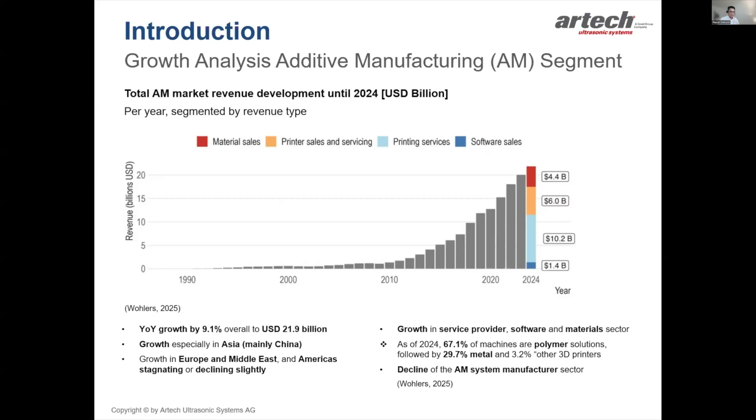It's very, very attractive. So let's have a look at the growth projection until 2033-34. Wohlers estimates the total AM segment to grow up to $115 billion. The key growth industries are health, aerospace, defense, and industrial.

Let's have a look at the value chain. How is the AM segment operating? This is a very simplified view of the value chain. Basically, the raw material is sourced from the ground and then processed or manufactured within the powder manufacturing companies.

There it is already crucial to define which kind of powder we are talking about — metal powder or polymers. This is also where Artech, or ultrasonic technology, comes into play first, helping in the powder processing stage of the powder manufacturing process. Then the powder is qualified according to particle size and quality. Once this is good, the powder enters the printing process.

In the printing process, the powder is filled into the printer, and then the 3D printer prints the parts. Within this process, there's also an integrated recycling process where Artech can help as well, to make sure the right powder goes into the recycling process.

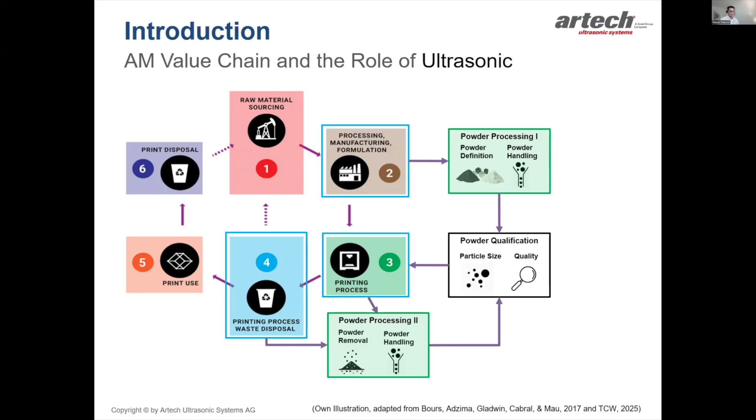So let's talk about Artech. Many of you have probably not heard of Artech — it's a pretty small company. We are headquartered in Switzerland, in Romanshorn at the Lake of Constance. We have a German warehouse for logistics purposes, and we were founded in 1991.

We're a small team, pretty agile, but we are benefiting from an internal and external partner network. We are a member of the Crest Group, established in 1961. It's a US corporation in New Jersey, and we are a member of several affiliates from the Crest Group. The Crest Group is the leader in innovative ultrasonic cleaning, welding, and joining equipment. Totally, we are a team of about 900 people.

So what makes Artec or our technology different? The current or previous state was to go exactly into a defined resonance point and bring parts into motion using a defined resonance. Artec, however, works within a frequency of 30 to 38 kilohertz. The ultrasonic generator scans the frequencies within the geometry and locks into the highest point, then sweeps around this point. Using this special technology, called frequency variation method, we are able to work with all geometries, metallic geometries. So we are very, very flexible.

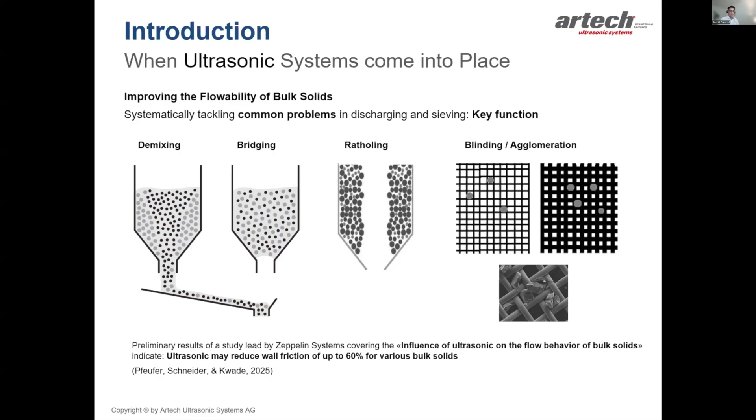So we are working together with several OEMs and partners. One is Zeppelin Systems. They have been conducting a study recently about the influence of ultrasonic on flow behavior of bulk solids, and the preliminary results indicate that ultrasonic may indeed reduce wall friction up to 60% for various bulk solids.

So in which kind of industrial areas are we operating? We are still in the powder manufacturing value chain—remember the second part of the value chain of the AM segment value chain. So we do ultrasonic discharging, dosing, feeding, and so on, and we also do ultrasonic screening.

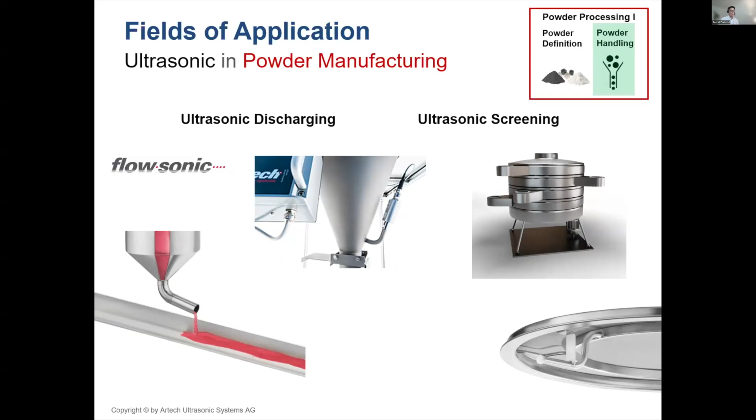Let's have a look at the ultrasonic discharging. On the left, you see a promo video where you can see that the powder, this is flour, is sticking above the outlet, building a nice bridge. Then we turn on the ultrasonic and the powder can easily, smoothly, without any noise, flow out of the cone. As you can see, we have to weld a waveguide to the outer wall, and then we can apply the sonic easily, and the powder can be discharged.

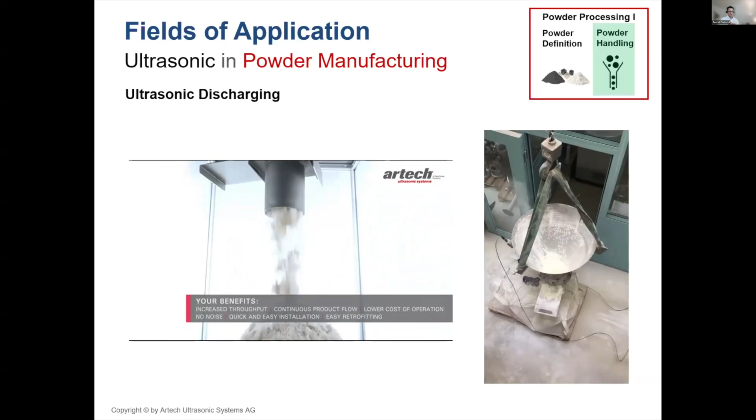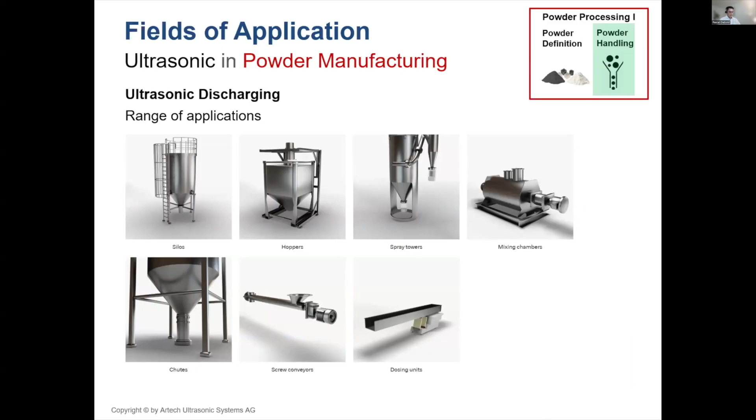On the other hand, on the right, this is titanium dioxide. The outlet is open, a bridge is formed, the ultrasonic goes on, and the powder can easily be discharged. Because of the technology, we are able to work with several applications—silos, hoppers, spray towers, pipes, whatever. Whenever there's a problem in flow, we can make a trial and help. That's a really nice approach: we can just give it a try everywhere where flowability must be increased. We might be able to help.

So when we look at the discharging sector, what are the influencing factors on the result? First is the material of the silo or hopper—is it stainless steel? How big is it, what's the diameter, how thick are the walls? How many sound points should we weld on the hopper or silo? The temperature, the humidity—very important for how the powder evolves or behaves—the size, and most importantly, the product properties. What are the characteristics of the product, density, and so on, very important. All those factors influence the outcome of our solution.

Let's have a look at one of the field samples. So this is a discharging hopper, discharging aluminum oxide powder.

The problem here was that agglomerates build up on the inner walls of the cone, causing quality issues for the end user because the agglomerates were falling down the pipe like snowballs into the final product. This was not desired by the customer. Before using ultrasonic, the customer had to clean the inside walls many times using loud mechanical knockers and air, a very energy inefficient technology.

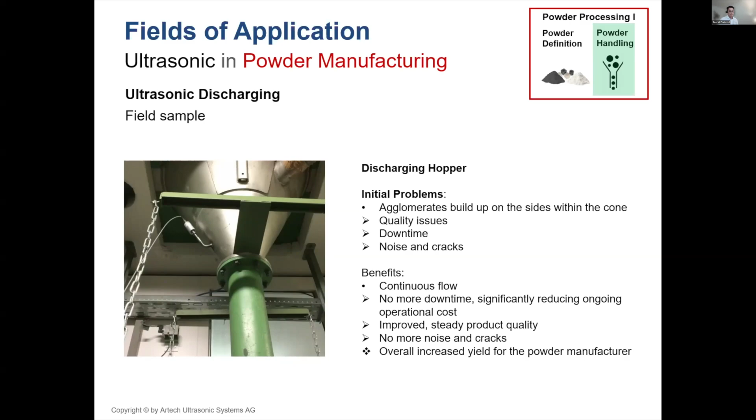With ultrasonic, we were able to ensure continuous flow. There was no more downtime, significantly reducing the ongoing operational costs. We could improve the product quality, no more cracks in the hopper, and overall the end customer was really happy because we could increase the overall yield for them.

Compared to classical flow aids, the benefits are obvious: continuous flow, almost completely residual emptying compared to mechanical knockers, for example, a high throughput rate, and almost no noise because we work at a frequency of 30-38 kilohertz, almost not hearable. The running costs are really low because the downtime can be reduced, and also the energy consumption is very low.

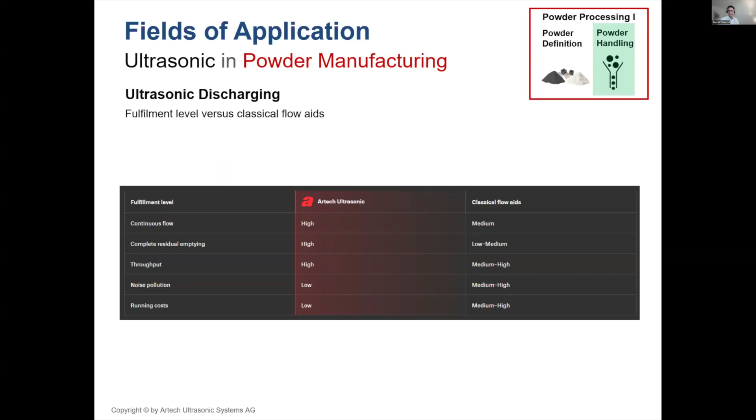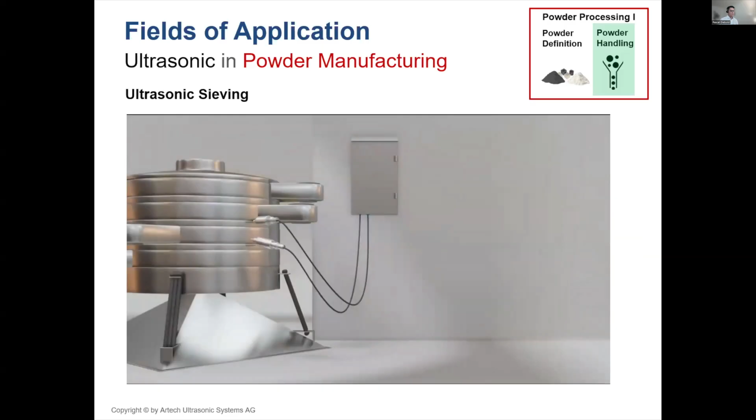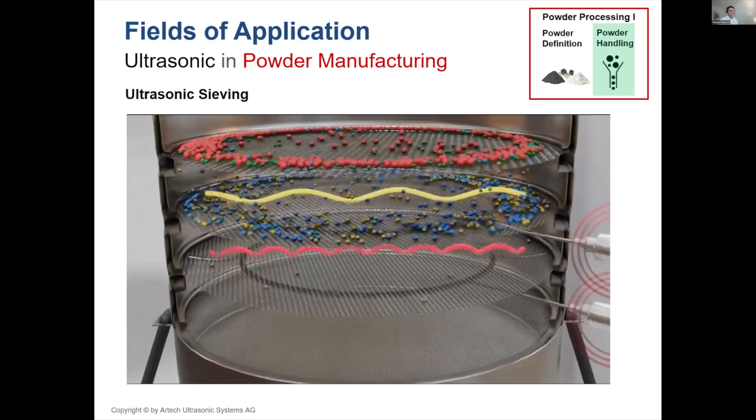As you can see, the powder flows pretty poorly without ultrasonic, pretty slow. Now we attach ultrasonic to the sieves, and as you can see, this video demonstrates that the throughput rate of the sieving process can be substantially increased. I'll show you some data later on about this. Compared to before, the powder is going through much faster, which increases the separation efficiency as well, and that also increases the yield at the end.

We work with several sieving machines, tumbler sieving machines, vibrating sieving machines, and so on.

Let's have a look at the field study. This study was conducted by our Japanese colleague. As you can see, the problem was, as I outlined before, always the same: plugging. The sieve was plugging. The customer used a 700 millimeter diameter sieving machine, so not too big. The mesh opening was 38 microns, and the task was to reduce the clogging tendency and increase the throughput rate.

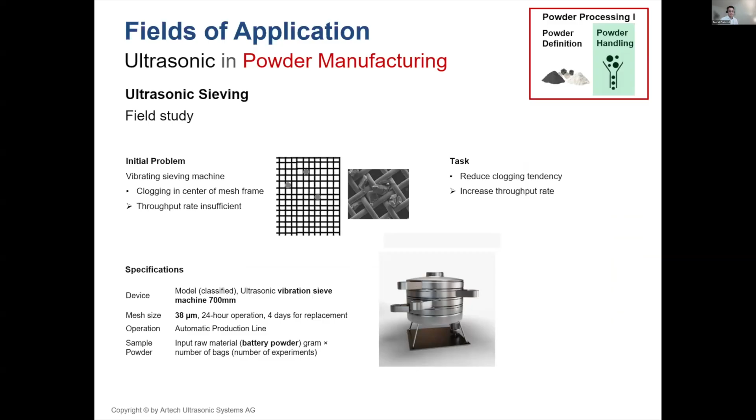From 0 to 1 minute without ultrasonic, 60% of the powder was still remaining on the sieve, whereas with ultrasonic only 30% was remaining after 1 minute. After 5 minutes, about 25% of the powder was remaining on the sieve without ultrasonic, and with ultrasonic already only about 2% remained. After 10 minutes, without ultrasonic still about 20% was remaining on the sieve, whereas with ultrasonic less than 1% remained.

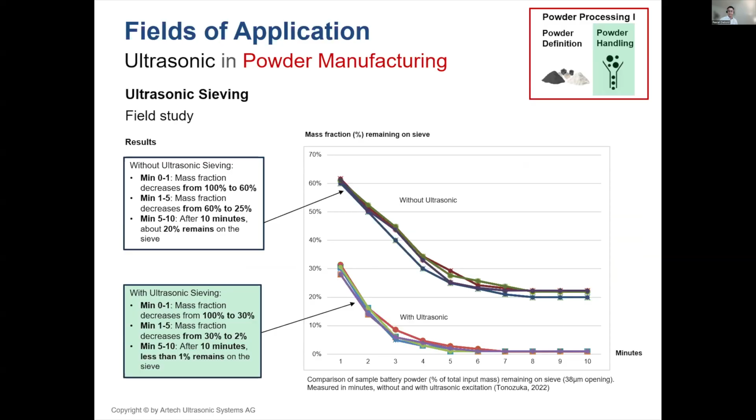This clearly shows that ultrasonic helps, regardless of the powder—whether it's battery powder, metal powder, or polymers—to increase the throughput. So let's have a look at the benefits.

Ultrasonic, as such, is the dominant technology when it comes to maximizing throughput rate and separation efficiency. What Artech does differently is that we never have our components within the sieving area. Our converters are always outside the sieving area, so our customers never have to fear any contamination. Our technology also enables us to work with several kinds of sieve designs. I'll show you later on, and we are very versatile.

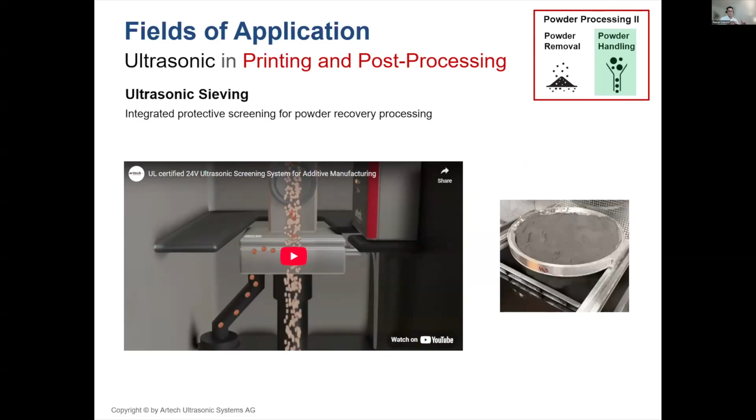Let's have a look at the next stage where Artech can help. Now we move from the powder manufacturing stage to the printing process. We look at the process where the powder is printed from the 3D printer and recycled within this printer or as a peripheral station. This video should demonstrate it pretty easily so you guys understand it.

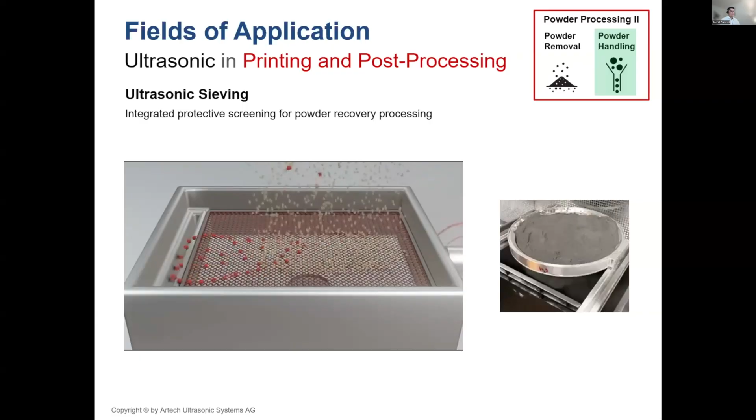As you can see on top, this is powder already used in the printing process, put through a recovery process, and it falls onto the sieve. The job of the sieve is to ensure the right particles move into the next phase, while undesired particles move out the outlet. At the end of the day, the end user wants to reuse this powder from the printing process back in his printing process.

Another video shows on the right how fast ultrasonic can sieve powder, and that almost no powder remains at the end, pretty fast.

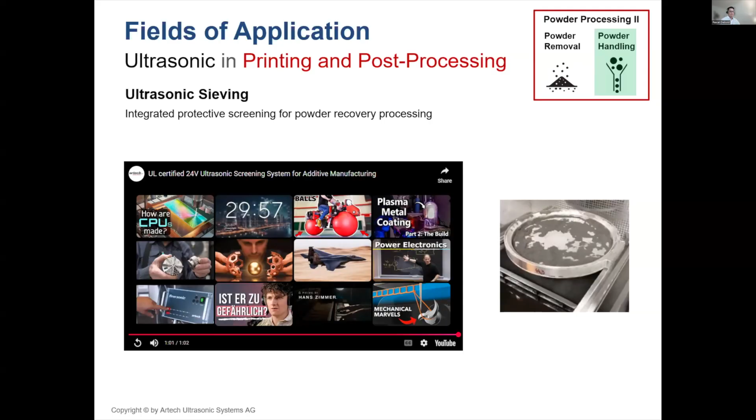This is an integrated approach by one of our customers, showing a sophisticated way to recover powder from the 3D printing powder process.

I don't want to go too much into detail, but on the left you can see our generator attached to the machine, and the cable with the converter attached to the sieve. The sieve's job is again to make sure the right particles go into the container that can then be reused in the printing process.

As you can see from this figure, the powder goes from the AM machine back to the recovery process, over a buffer, and the vibrating chute then doses it into an ultrasonic screen. The ultrasonic screen makes sure the oversized particles go as fast and precisely as possible into the oversized container, and vice versa, the good powder into the good container.

This is one of our customers in Switzerland, a young startup showing a laser bed powder fusion system. It's a very unique, compact system.

So they are using a peripheral station. This is a pilot system. I'm just showing this for demonstration because it's not the final product, but it really nicely shows the ultrasonic process.

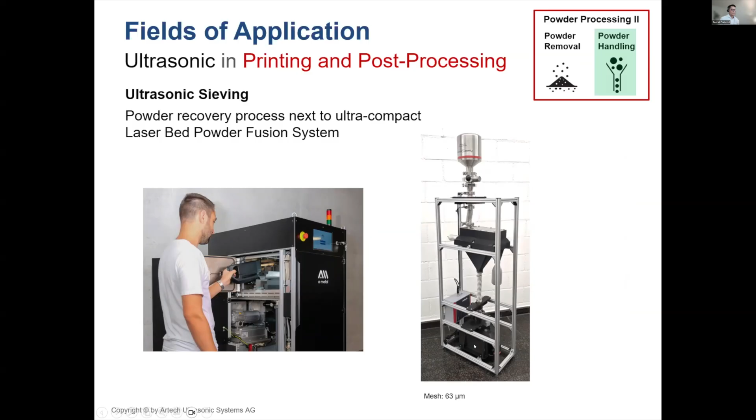Next to the ultrasonic components, Artech is offering rectangular and round sieves for the integrated printing post-processing part of the value chain. As you can see from this picture, we offer several dimensions, and the waveguide, this part here, which allows the converter to excite the sonic to the sieve, can be placed everywhere according to the specification.

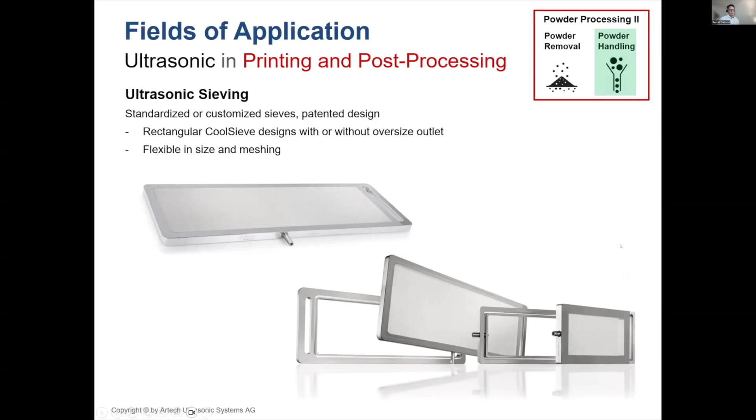So why is this relevant? Why am I showing you this? Because Artech has a special patent on this design. If you look at the sieve on the right lower corner, the waveguide is screwed onto the inner ring of the sieve, and the sonic is only applied to the inner ring where the mesh is glued. This allows the OEM to completely isolate the sieve without sacrificing sonic performance on the inner ring.

We already have a lot of customers who really like this design because it helps them use less power than before, create very compact sieve designs, and sell even more compact machines.

And why is it called cool sieve? Because the outer area always remains cool, since it's decoupled from the inner area. It's a bit technical, but pretty simple. At the end of the day: more compact design, less power needed on the sieve, and very efficient.

We do have UL NFPA 79 certification, and can work with ATEX Zone 21/22. Design can be made according to the machine, with easy installation and retrofit possible. So existing machines can be retrofitted with our systems, and remeshing can take place wherever you like, freedom of choice. We are very flexible in this. Those are the benefits of the cool-sieve design.

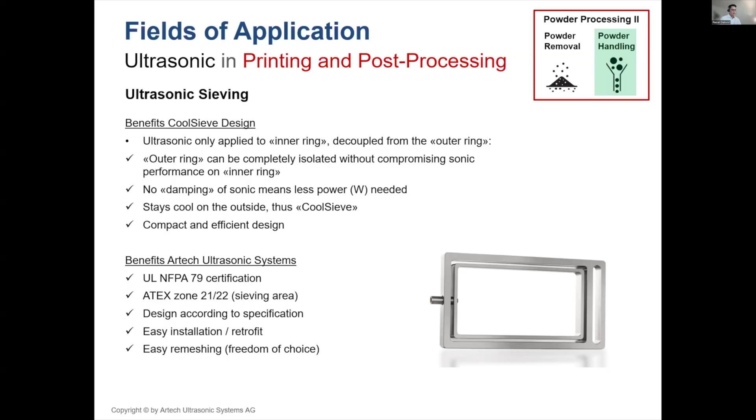So let's go to the last part of the value chain where we can help. We had the powder manufacturing value chain where we help industrialize the powder manufacturing process through ultrasonic discharging and sieving. We helped in the printing process, and now we are in the post-processing.

Once the parts are printed, there is always remaining powder on the printed part, and this is very valuable powder. So our end users really like to recover this powder. There are different technologies on the marketplace, and nowadays ultrasonic can also help almost completely remove the residual powder of the printed parts, maximizing powder recovery and increasing yield for the end customer. Again, no contamination because the parts are not within the area, very low energy consumption, and low noise.

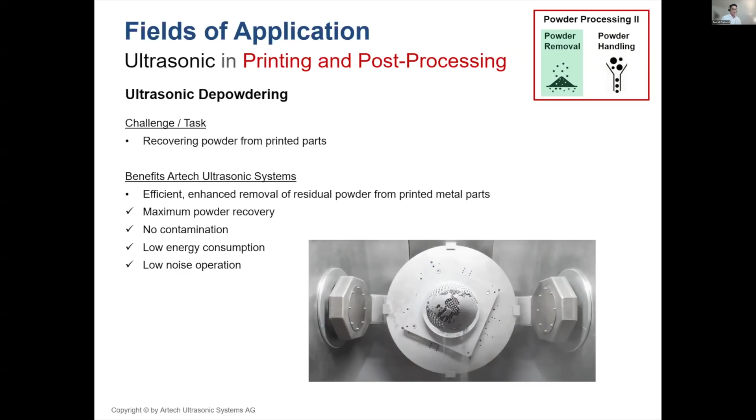So what do we offer at all? We are an ultrasonic component supplier. We are not a machine builder, okay? So we offer generators, converters, cables, sieves, small sieves especially, and accessories, depending on your task. We're very happy to get in contact with you. Whatever your task is, I'm sure we can help you.

Yeah, I'm already at the end. Hopefully it wasn't too boring after lunch. No, everyone is a bit tired, but hopefully it could wake you up a bit. And I'm very happy to answer any questions you may have. And if you want to get in contact with Artech, feel free. Visit our website, LinkedIn, and so on.

Thank you very much for your talk, Pascal. As I can see, there are some questions. How does ultrasonic mitigate segregation or demixing due to differences in particle size or differences in density of the product?

Very good question. I believe this is about the discharging process. So what ultrasonic does is not really impact the inner powder mix. What Artech does is only apply the sonic to the walls of the geometry, and thereby the wall friction will be reduced. So if the powder can flow continuously in the discharging, in the cone or in the silo, once the outlet is open, then in many cases there is even no demixing possible because the whole powder can flow in the same motion out of the outlet cone. I hope this helps.

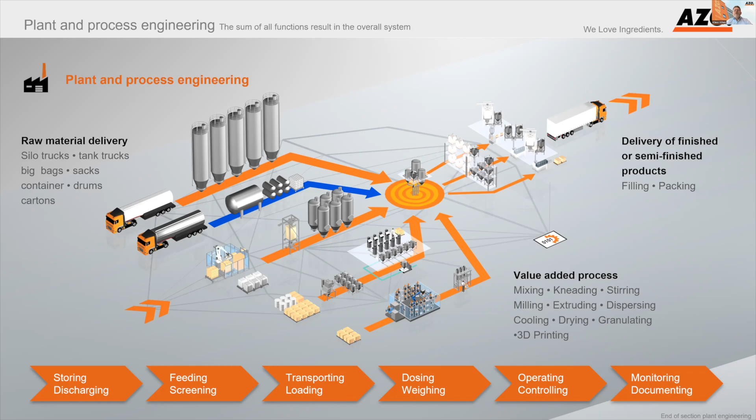What is AZO doing? AZO, I would say our passion is powder handling. That means we are handling the powders in the plants, in the production plants, from the incoming goods through the whole process to the value-added process in terms of mixers, kneaders, and for today's discussion, 3D printing systems. And in between here, we have all the conveying, storing, screening, transporting, weighing, controlling, monitoring and automation of these powders. We have a wide range of businesses. We are organized in different business units, always looking for the end product, starting with the food department.

This is our base. We started in the bakery industry 76 years ago, which contains everything around bakery, baking mixes, spices, flavors, and so on. Next part is so-called Vital, which is pharmaceutical business, dairy industry, confectionery, and so on.

On the non-food part, we have two different divisions. One is Chem, which contains cosmetics, personal care, cleaning agents, construction materials, and as well the additive manufacturing metal part. And last but not least, the polymer industry, looking for compounding, PVC, dry blends, and so on, as well as additive manufacturing for polymers. So there's a combination here.

Looking at the additive manufacturing world, let me start with the metal part. There's a big landscape of different processes in 3D printing. We are mainly focusing on powder-based processes like binder jetting, powder bed fusion, and so on. This is our strength and our know-how, so this is our concentration.

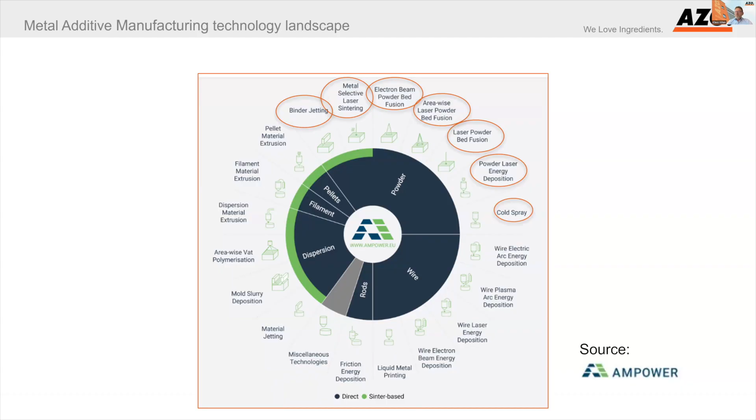Metal powders present a lot of different challenges in the additive manufacturing industry. We have very fine and always very heavy powders compared to other industries. Very fine, as already mentioned by Mr. Diepol for the screening systems.

We have a lot of reactive powders which have to be protected against the atmosphere. We have a lot of metal powders which are explosive, so protection is needed. We have to protect the operators too, because a lot of metal powders are CMR, meaning cancer causing or could cause cancer. We are talking about very expensive materials, so loss-free use is a must.

And we have to ensure quality in the processes, because the printers only work well with perfect materials. So this is one of the biggest challenges.

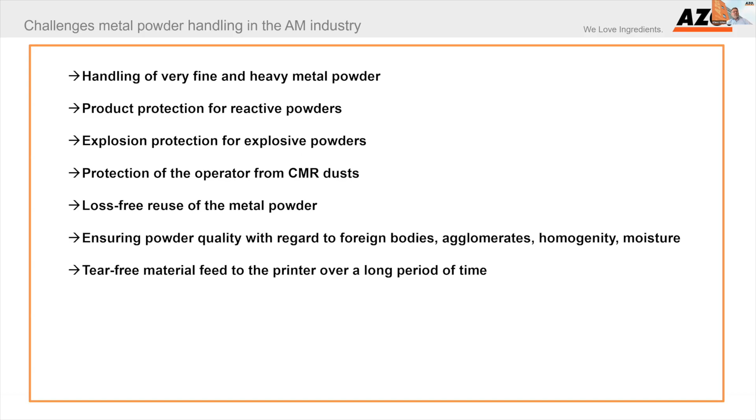The printers have long printing jobs, 24 hours, 48 hours, and so on. We have to take care of tear-free material feed to the printers. This is not typical for a normal powder process. Metal powders could also be abrasive, depending on what you have, so we also have to protect the equipment itself due to abrasion and so on.

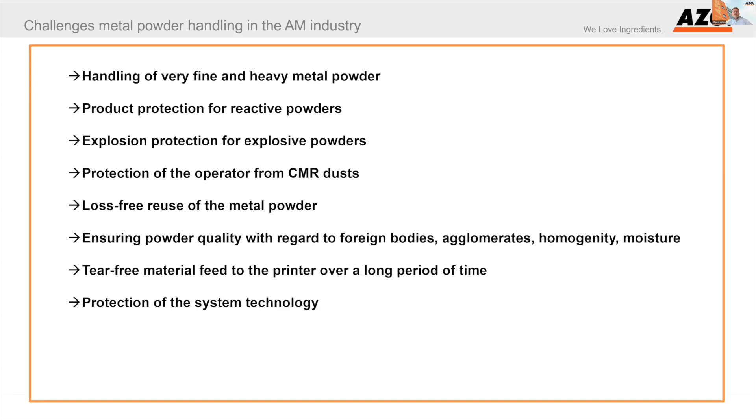How do we do this? Let me say a few words on what I'm going to show you. I'll show you some concepts, principal concepts and solutions, not going too much into detail, because then time will not be enough.

How does it typically look on the metal powder side? We always have a point for putting in new powder, and a point for unpacking powder when the print job is done. We collect all the materials at one point, and this is special because it's an integrated system - not an offline system, but an inline system, because we also pick up the overflow. We combine it together in a receiving unit, prepare it again in terms of dosing and screening, and have perfect powder afterwards which can be sent to the printer again.

If you go a step ahead, this could be done as well for multi-printer feeding, as we call it. This means we have one centralized station for preparation of the powders, and out of that we could feed several printers depending on how big the printers are. There's always a difference in terms of what kind of incoming packaging we have - this is flexible, even in how many breakout stations we have for unpacking. This could be combined, everything in one central preparation system.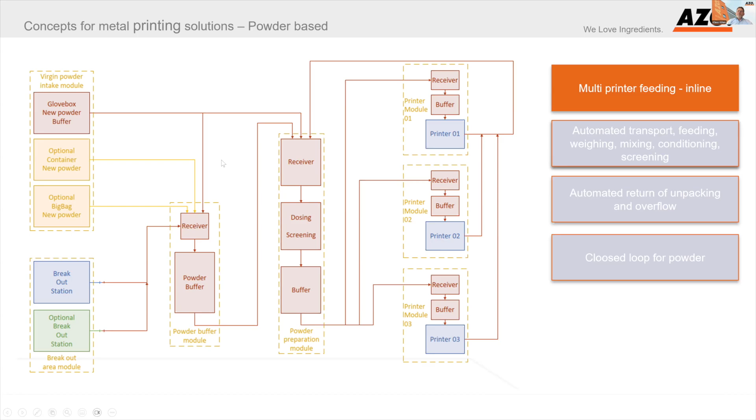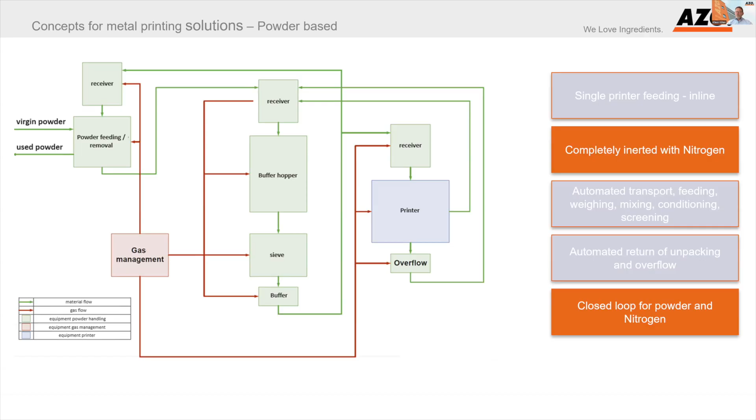That's just an overview of how a system could look, for example for multi-printer feeding. We have an incoming station here, actually using a glove box for the small drums which are very common in the industry, with buffering stations, and then a central preparation station which could feed several printers, including gas management, which will then serve the printers in a perfect way.

To give a more or less detailed example for a high-end system, which has been designed and produced with an OEM partner of ours, and we are allowed to show this here. A complete, highly automated system for single printer feeding, which is an LPBF process with a defined throughput.

And the system is flexible in terms of the metal powders here. We just have to do a parametrization for a special powder, no interaction in terms of mechanical modification or something like that.

With the system itself, we have powder handling under nitrogen atmosphere, a closed circuit for low nitrogen usage, as well as removal of the powders in the glove box. So operator protection is always given, product protection is always given, and explosion protection is also given all the time.

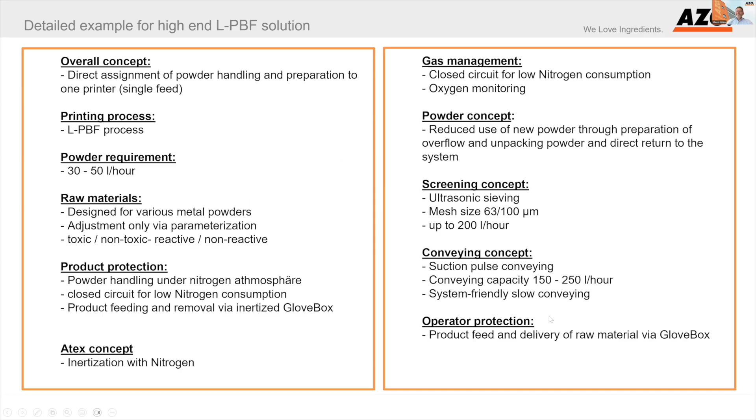Okay, and you do see here ultrasonic sieving, so the introduction from Mr. Diebold was perfect. How does it look like? Just to get a little bit more detail here, how does it look like?

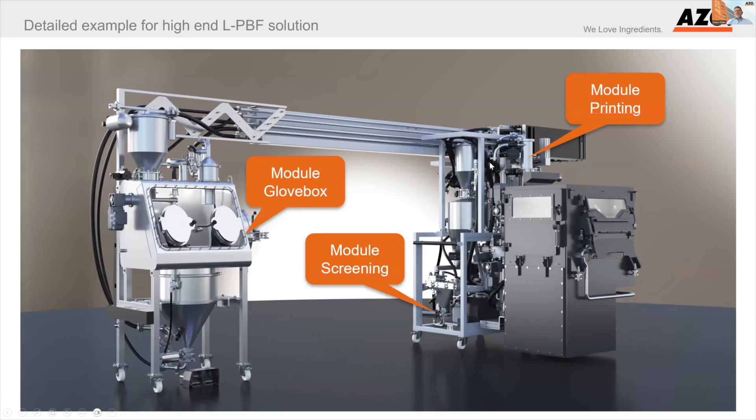Here we have a central dump station for the powders with the small drums, a so-called glove box module, which is connected to the system here, to our printing module, as well as a screening module. So therefore, again, product protection, operator protection, powder return is possible and done, completely protected and connected to the system itself.

Even so, here we have our so-called screening module with the full reuse of the powders. Also quality assurance and screening is given here.

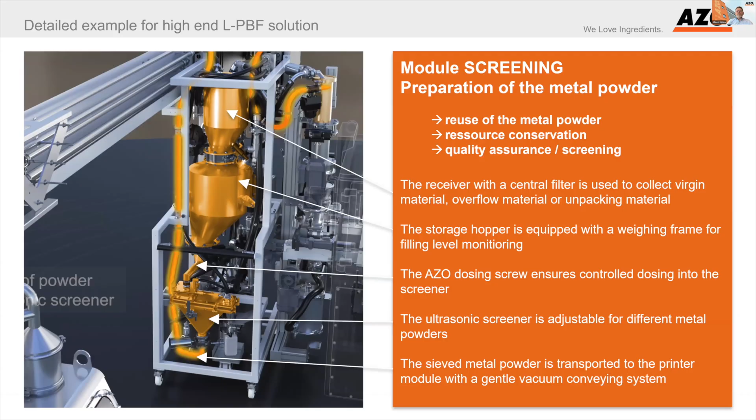This is a very special design because it's nearly integrated in the printer, so therefore it's one common system and direct feeding of the printer for the print shop here.

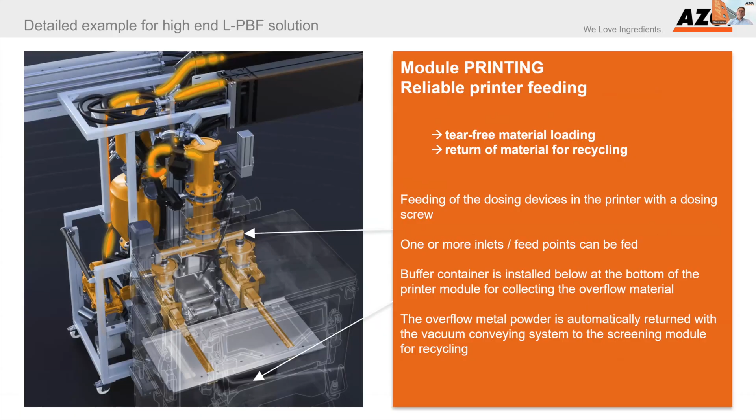Always inline, so nothing to do with it. It's working for itself and just has to refill the missing powder by the glove box. Also, the unpacking is done in the system, also in the closed loop. Here, in that example, we are unpacking in the printer itself, which is a little bit special, but always under controlled conditions here.

So that's for the metal. Just wanted to give you some examples of how the system has to look like, how the system for an integrated system is looking like. And as I said, just giving examples of how we are working on that.

So, the next package is the polymer, because we are considering also the polymer, which is a little bit different. And again, the landscape here is just one part for us, which is powder or pellet based, which we are considering here and which we could serve with our systems.

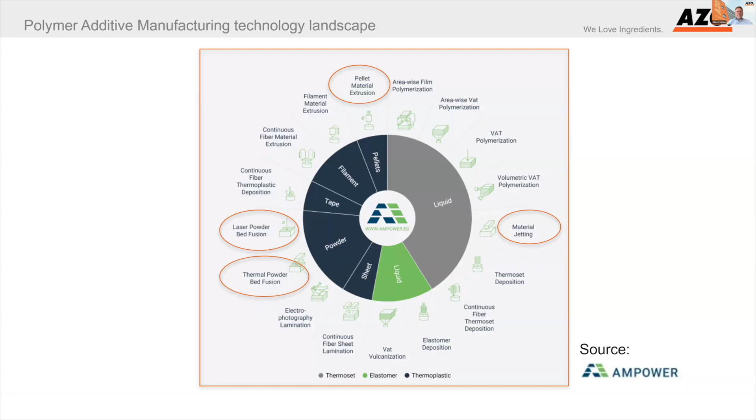Challenges in the polymer look a little bit different. As always, we have very fine polymer powders which are not easy to handle. We have to supply also single and multi printers, but we do have an increase of powder because we are getting bigger printers, and most of the time, looking at today's situation as well as the future, we are expecting really print factories with several printers, even which have to be fed from one system.

And ergonomics for the operators is always a question here. With these volumes we are actually facing, this couldn't be done completely by hand. So in the print factory, there's an integrated system needed for feeding and for recovering the powders.

Again here, loss-free use of the powders. Always also in the polymer industry, there's high cost pressure in production and in terms of efficiency. So therefore, there's a need for that.

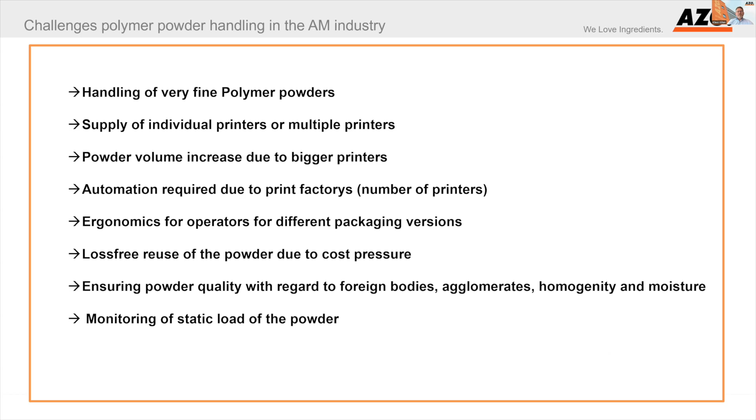Ensuring the powder quality means clear foreign bodies are not allowed. Agglomerates, homogeneity is one of the most critical issues in a printer. If you look at the printing process, here on the polymer powder, there's an additional issue, which is static load of the powder. That's typical for a polymer powder. It's getting static load on it, and you have to get rid of that because the printer couldn't work with a static load, and the powders will not work.

Some overview of the concepts we are working on and delivering. Our incoming goods are typically big bags or bags, fed into a mixing process with a scale. We generate a recipe with new powder and used powder breakout, as well as overflow. Requirements from printers vary on how much new versus used powder can be used. The recipe depends on powder quality, then it's prepared properly and goes through a sieving process, since no agglomerates or foreign particles are allowed, before feeding the printer properly.

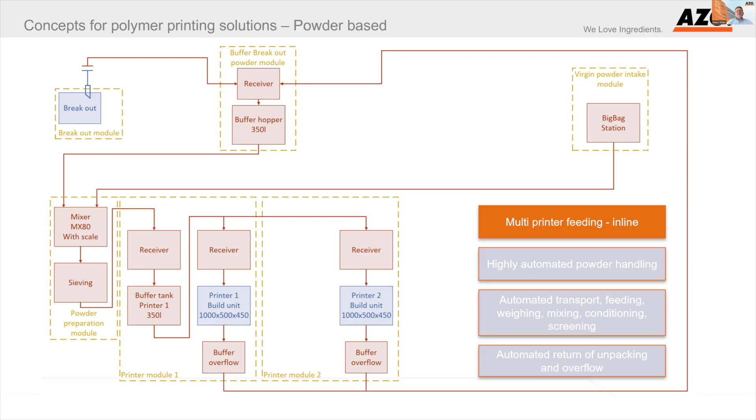There's also the possibility of single printer feeding as well as multi-printer feeding, very similar to the metal powder process, with different designs and requirements. Here we're looking more at bigger print factories, since we see much higher potential for printer factories.

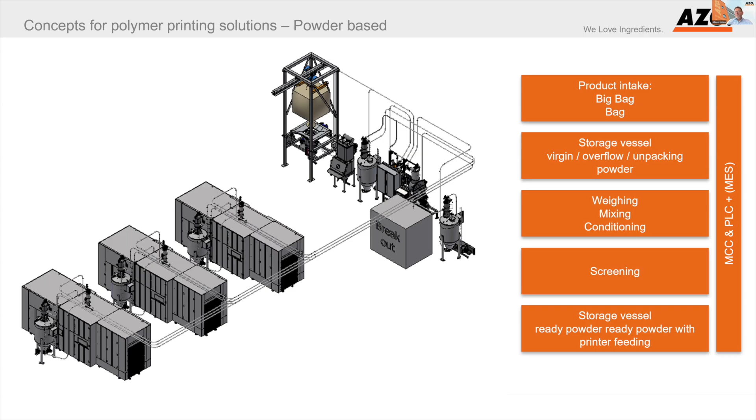This looks very similar, with different applications. For example, incoming virgin powders are typically delivered in big bags or bags, which go through different stations. We have a lot more buffering stations here due to throughput, and also because of mixing and moisturizing the material. At the end, we feed several printers. There are also buffer stations in front of the mixer and in front of the printer, which is very important and makes the difference compared to metal powder systems.

I'm nearly through. What features do we have here? An automated and closed feeding system, which is important as an integrated system, minimizing dust and so on. These systems are all tailored, meaning each printer needs its own system or connection with its own philosophy. So we have our basic designs, which we tailor to the customer's request or the service provider's request.

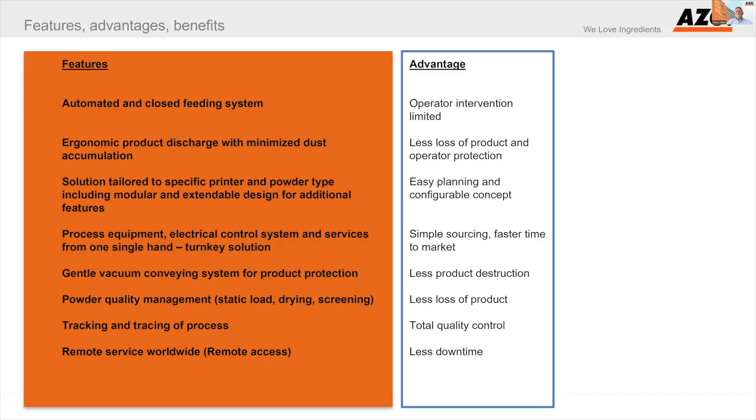What about the internal structure? We can supply the complete system as a turnkey solution, since we also handle the control system. We always look for gentle conveying, to protect both the equipment and the powder quality, which is one of the highest priorities. We can also do tracking and tracing, and worldwide service is provided. With these integrated systems and concepts, we see a lot of advantages and benefits for our customers, maybe for you.

That was a quick run-through of what we do and provide for metal powder additive manufacturing as well as polymer systems—a little different, with its own challenges. Thank you.

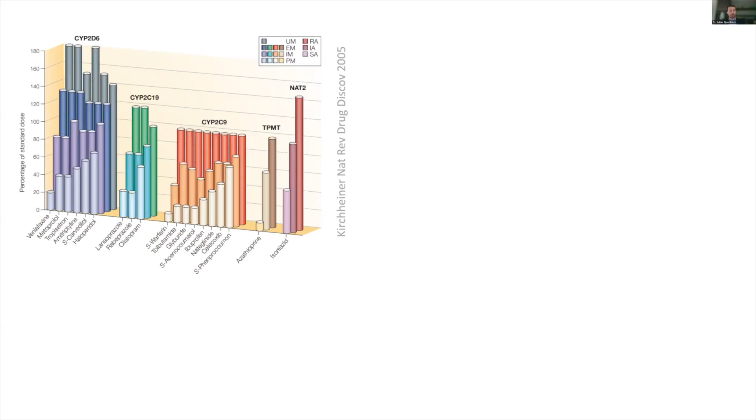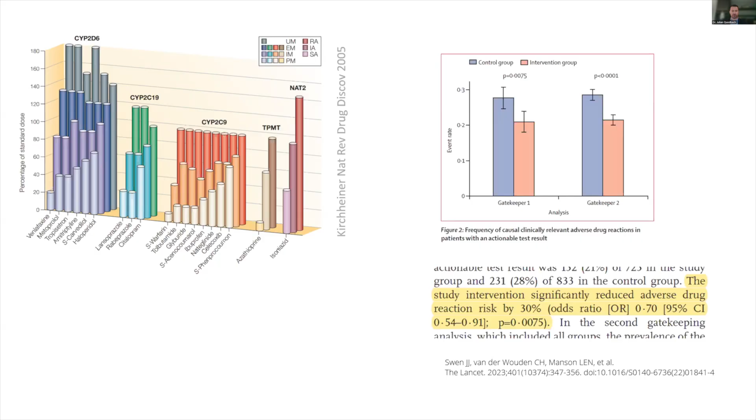If we adhere to these kinds of individualization approaches, it's possible to reduce adverse drug reactions by 30%, which is a lot - greatly improving the quality of life of patients, but also reducing sick days.

What's quite interesting, and some of you may not know, is that women on average suffer from nearly twice as many adverse drug reactions as men, because typically only men, or primarily men, are reflected in clinical trials. And worse - because it's been known for the longest time - children are not little adults.

So if you have a certain medication prescribed to adults based on their weight, it's impossible to just take a fraction of that drug based on the child's weight and administer it that way. So for pediatric patients, we need dedicated medication.

Including all of those concepts is the overarching framework of personalized medicine, which the European Medicines Agency describes as using the individual's phenotypes and genotypes—basically enzyme status, metabolic status, different technologies, and lifestyle data—for tailoring the right therapeutic strategy for the right person at the right time.

With the potential challenge that it may be necessary to manufacture medication for an individual patient. In many cases it will be larger patient groups, but in very critical cases it can be necessary to manufacture an oral medication for one individual patient.

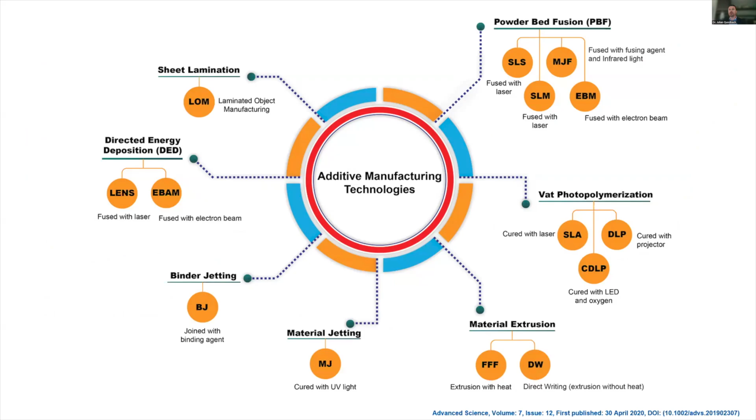This is just a transition slide showing the different technologies that exist, and there are of course more subvariants available. For pharmaceutical 3D printing, it's possible to consider two different strategies of manufacturing.

One is at the point of care, close to the patient, which could be a hospital pharmacy or a community pharmacy. The other is centralized manufacturing, which could be compounding centers, as we have in the Netherlands—larger centers able to manufacture individual medication manually for a larger group of patients and supply those to others.

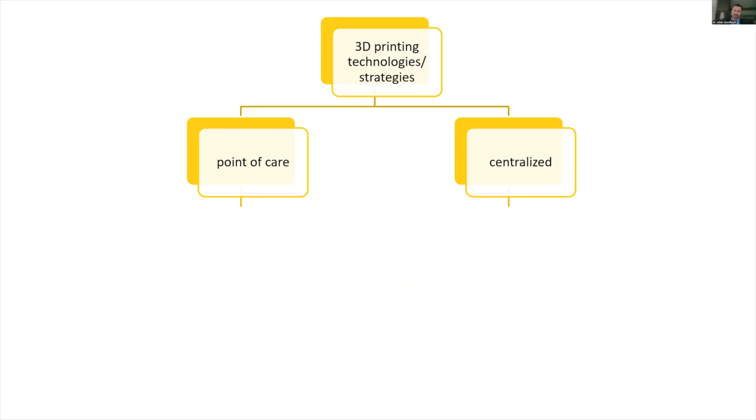In Germany, this is not possible. Centralized could also mean industrial manufacturing. And depending on whether you want to manufacture at the point of care or centralized, that's like a direction determining what technology you may want to choose.

For point of care, extrusion-based technologies are more promising. For centralized manufacturing, the powder-based technologies are interesting. Here we have a total of four technologies. I will also go into some variants and proprietary technologies later on, but currently we are investigating mostly within the field of fused deposition modeling and semi-solid extrusion for the extrusion-based technologies, and binder jetting and selective laser sintering for the powder-based technologies.

I guess that most of you know the different technologies, right? In fused deposition modeling, we have a filament that is melted, plasticized, and then the object is built up layer by layer.

Here, the main challenge is in the manufacturing of the drug-containing filament, because instead of those high-performance polymers used in commercial 3D printing and additive manufacturing applications, we need to use monographed pharmaceutical quality polymers that have very different properties. They were not developed to form a continuous filament—they were developed for very different powder-based or melt-based processes, but certainly not for this. The manufacturing process of those filaments is quite challenging, and at the moment there are no commercial drug-containing filaments available.

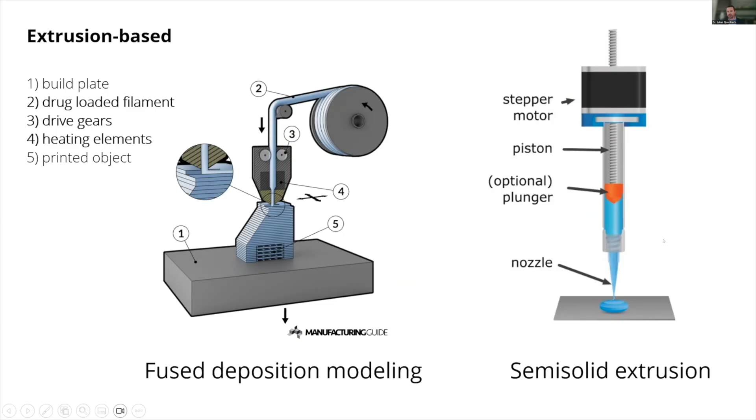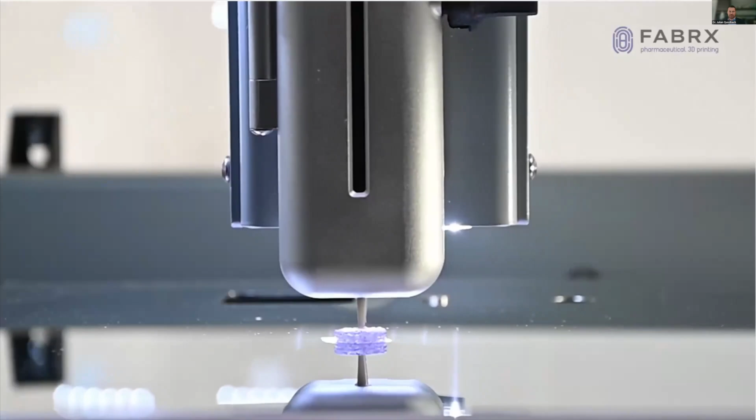In this video from the company Fabrx, a company that manufactures pharmaceutical 3D printers, you see how a nozzle is depositing the drug-loaded hydrogel that will then be dried afterwards to manufacture an individualized dosage form. This technology is much more versatile than fused deposition modeling, because the starting material needed is a semi-solid—something that most pharmacists have a very good understanding of and the capability to realize in-house.

For semi-solid extrusion there are already quite a few printers on the market for pharmaceutical applications. Here I just show a selection of different manufacturers, and you can buy them. All of them have their different approach to pharmaceutical point-of-care printing.

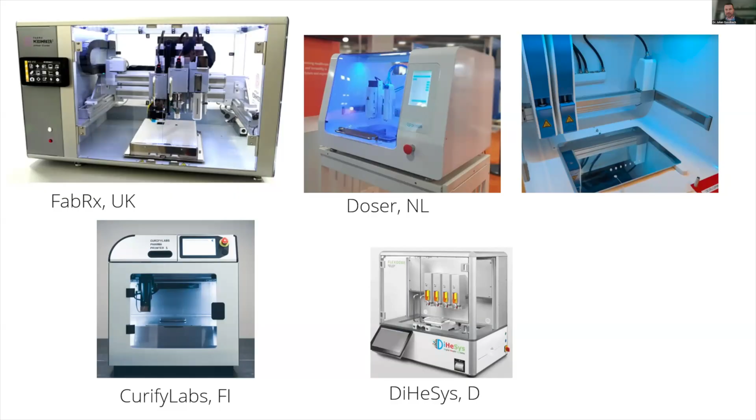CurifyLabs is offering a more or less closed system where you don't have the freedom to make your own formulations. FabRx and Doser give you complete freedom for formulation and process development. So it's basically a different approach on how you want to realize your formulation, how you want to cater to your patients in the end.

What you can do with these technologies - these are just some pictures from studies we did in our lab. There are tablets loaded with imatinib mesylate, an anti-cancer drug used especially in treatment of pediatric patients, where there are hardly any dosages available - the lowest available dosage is still higher than the highest dosage needed for a lot of the children treated with this drug. So here we were able to repurpose commercial formulations into different dosage forms of different dosages to really individualize the dosage for those patients.

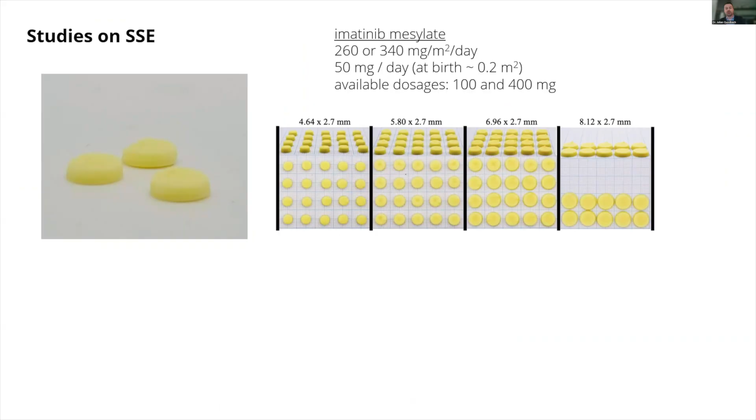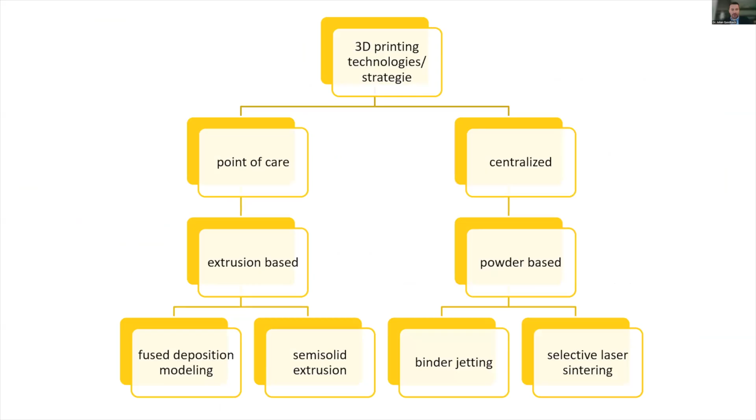However, for me this is a very different field to discuss - the powder-based technologies. All of you, I'm sure, know how powder-based technologies work: creating a thin powder layer and then either using a binder or a laser to solidify this powder layer.

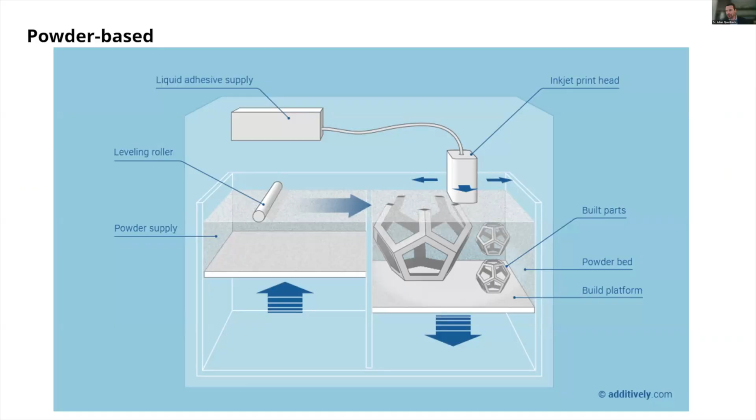On binder jetting, not a lot of research has been done, to be honest. There are only a handful of studies that consider pharmaceutical binder jetting. I think this can be for multiple reasons, because we have to formulate multiple formulations for one process - we need a well-flowing and spreading powder formulation containing the drug substance, and we have to have a good binder formulation that can be printed accurately.

However, not a lot of research, as I mentioned, is done on this. More research is actually done on selective laser sintering, or laser-based powder fusion, where a laser is used to solidify the polymer and drug mixture.

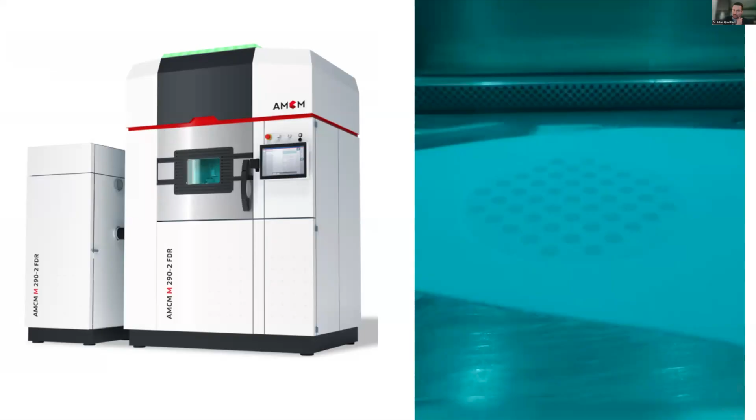This is a video from the printer that we have in our lab. It's a modified metal-based printing system, modified in the sense that the laser is a different one. We are printing with between 0.1 watts and 5 watts, which is better for the drug substances we are using, but also for the polymers we are using.

Because we certainly don't want any drug degradation due to laser irradiation. In the video, you can see how the laser scans over the powder bed where the tablets are, sintering - or in this case actually melting - the particles together. Then a new powder layer is slowly created on top, and the process continues from the beginning.

I'm quite happy with this technology because I think it has certain advantages over the commercial manufacturing technologies. Not only can it cater to individuals, but it's also possible to use very simple formulations. For most formulations we've looked into, we only use the pure drug substance and a binder, which can be a polymer or another thermoplastic material. Then we're also adding silicon dioxide, typically as a glidant, to improve flowability. We mix it and are directly ready to print, and we only see very limited segregation of the powder particles during printing. However, that doesn't mean we have to stick with very simple formulations.

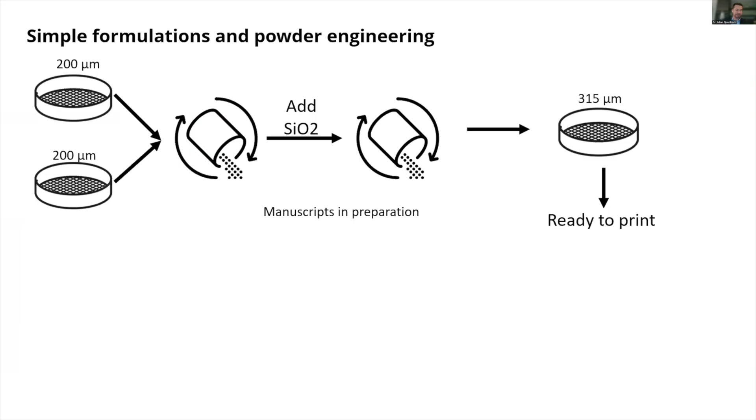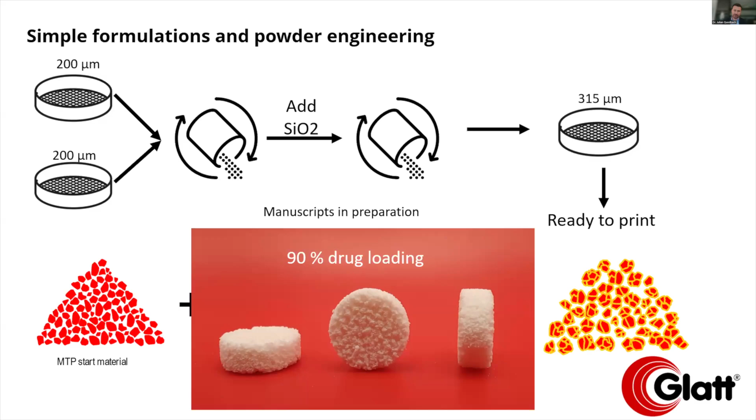Together with the company Glatt, we are looking into the benefits of powder engineering, in this case to increase drug loading. If we're only physically mixing drug and polymer, we need a quite high amount of polymer to get hard tablets with low friability and certain mechanical strength. However, if we take the drug, dissolve the polymer in a suitable solvent, and spray coat the particles with it, it's possible to reach much higher drug loadings because the polymer is much better distributed throughout the powder, and then throughout the printed matrix in the end. In this case, we were able to realize a drug loading of 90%. We're also learning a lot more about the powder properties important for pharmaceutical additive manufacturing.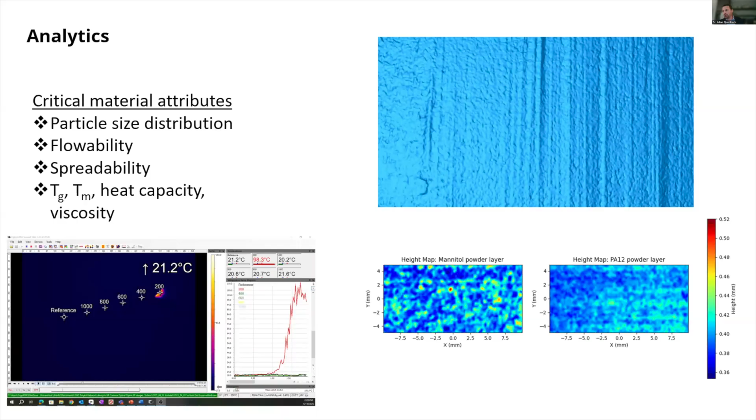But this has to be established to really demonstrate that the technology is feasible for pharmaceutical manufacturing. So until now, everything I've shown was more academic, or actually clinical applications of it. However, there are also industrial companies involved in pharmaceutical 3D printing. I'm just going to briefly highlight who they are and what technologies they use.

A completely different approach is presented by Laxxon Medical, shown here on the bottom. They are using a screen printing approach, so additive manufacturing using screen printing, the same technology used to print colorful designs on t-shirts, really squeezing ink through a screen multiple times on top of each other. They've paired up with the company Adare in Italy, and now have a GMP facility installed there, with a comparably high throughput compared to the traditional additive manufacturing technologies I spoke about before.

They can also build in additional safety features, like anti-counterfeiting features for critical medication, by for example printing on a QR code that can be scanned to validate the truthfulness and correctness of the medication. And what I really like is that they're able to manufacture mini tablets. Mini tablets have a diameter of about 2 millimeters, sometimes 1 to 3 millimeters, so quite different.

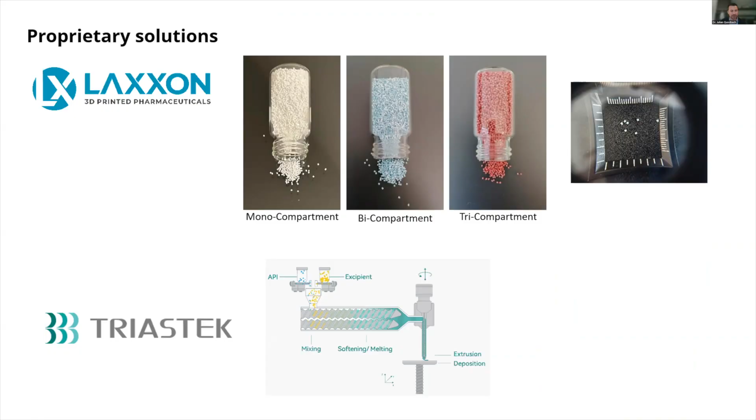They at the moment have 3 INDs, investigational new drug product approvals - one by the US and two with the Chinese government.

But this is just to show that 3D printing in its variety is coming to the pharmaceutical space. It will never be used to manufacture ibuprofen or aspirin, I'm very certain of that. But at the same time, it is finding its place there, and it's slowly getting translated to patients.

So I hope that I was able to demonstrate, very roughly and at a top level, that 3D printing is a set of very capable technologies, also for point of care manufacturing and industrial manufacturing of medicines, not only for prototypes or other individualized products.

It's extremely well suited for personalization, where I would think that the extrusion-based technologies are probably the best choice, and then for mass customization, or also clinical trial medication, the powder-based technologies are taking the lead.

We are learning, or have learned, that most pharmaceutical excipients are working quite well, I have to say. Certainly there are some exceptions, but generally we have a quite wide array of materials that we can use. However, we still have to understand how to use them properly and to optimize processes for these kinds of technologies.

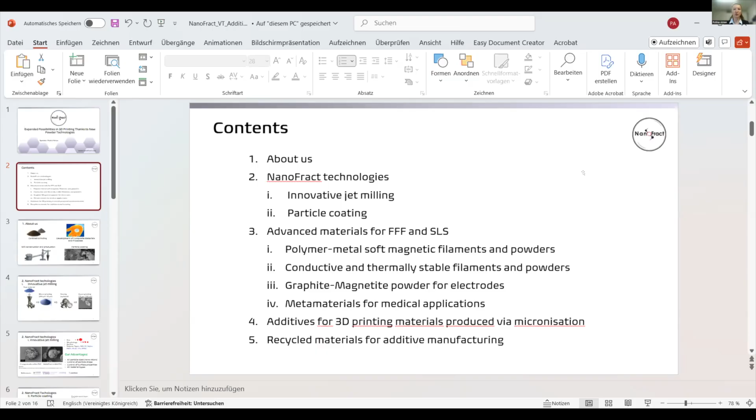And the first point, I want to describe how our fine grinding, or also called micronization, has contributed to the production of additives for 3D printing materials, especially the nanoparticles made from polymers. And last but not least, I will briefly discuss how our technologies have contributed to the use of recycled materials for additive manufacturing.

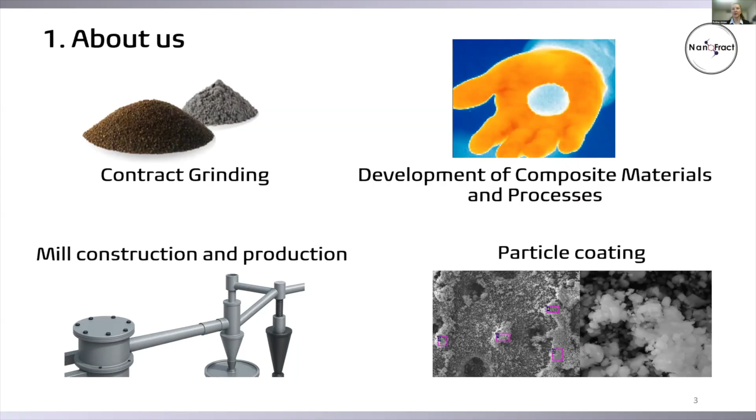Our business is based on four fields. The first one is the contract grinding of different materials from soft to stiff. Then we construct and produce mills on customer demand. As a third area, we develop composite materials and processes which are customer oriented. And with the fourth area, we mix or mechanically alloy different materials together into the composites using our innovative particle coating technology.

Now I directly go to our innovative jet milling technology. Here you can see how our typical production line using this technology looks like. Usually we receive raw material as granules, usually polymers. They are inserted directly into the conveying chamber.

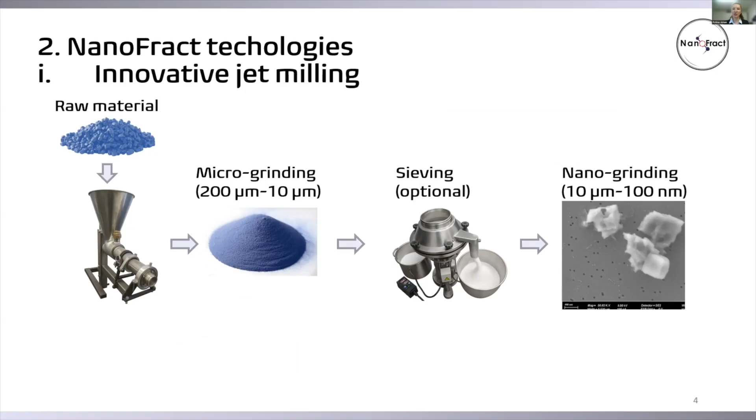After that, they reach the grinding chamber directly, where they are milled to the size from 200 up to 10 microns. After that, we conduct optionally sieving to obtain more narrow particle size distributions. And at the last step, we repeat the grinding to obtain particles from 10 micrometers or at nanoscale.

This slide shows you the main advantages of our jet milling technologies. On the photo, you see for example the PVC plastics milled by our technology compared to the PVC milled, which is cryogenically milled using common ball mills available on the market. It is clearly shown that our particles obtained by our technology have a more round form, a smoother surface, and generally integrate better compared to the cryogenically milled particles, which makes them suitable for additive manufacturing applications.

The second advantage is that our jet milling technology is adjustable for almost all types of polymers, particularly polymers used for additive manufacturing, like ABS, nylon, PEEK, polyamide 66, TPU, PPSU, or others. Our main advantage here is that due to this flexibility, we have full control of particle size, particle morphology or particle form, and particle surface. And these properties are all important in the additive manufacturing area.

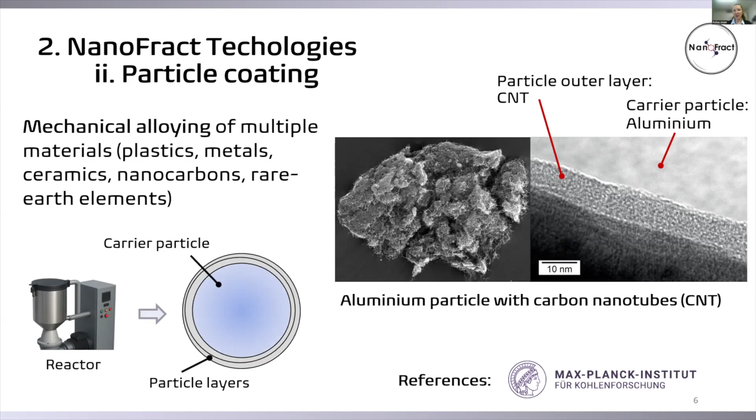On the right-hand side, you see an example: an aluminum particle covered with carbon nanotubes. Currently we have a project with the Max Planck Institute on this mechanical alloying.

Now I want to show you how our technologies, both grinding and particle coating, have already contributed to the creation of advanced materials for additive manufacturing production, for example fused filament fabrication or selective laser sintering. The first example is the polymer metal, a soft magnetic filament and powder.

With both of our technologies, we were able to create a composite soft magnetic powder. We have already extruded a soft magnetic filament from it, which has 70% metal particles. We have already printed and tested some parts from it, for example in the form of small electric motors.

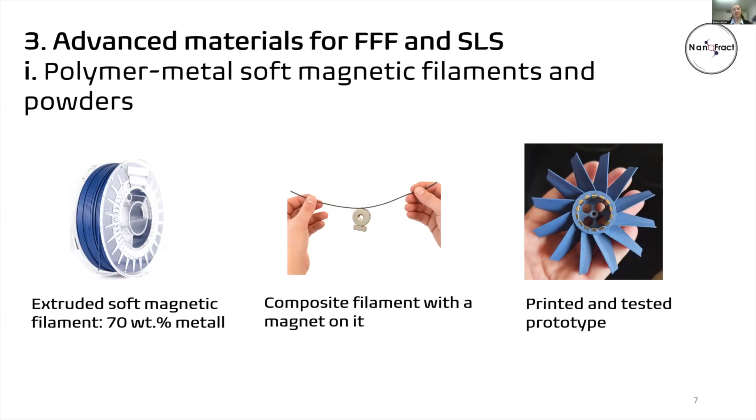Here are the main advantages compared to the alternatives found on the market. The only alternative we found for soft magnetic filament is PLA iron filament, which is corrosive and only suitable for hobbies or maybe home decoration. Compared to this, the composite polymer we created shows no moisture absorption, because the metal particles are tightly coated with plastic, so there is no space between particles.

This makes the material suitable for industrial applications. The other examples found on the market were soft magnetic semi-finished standard products like plastic metal pipes, and due to the simple production techniques used, you can only make simple parts from them. The main advantage of our technology is that parts created with our materials are magnetic throughout the whole volume, and suitable for many additive manufacturing production techniques, so you can obtain any complex geometry of a part.

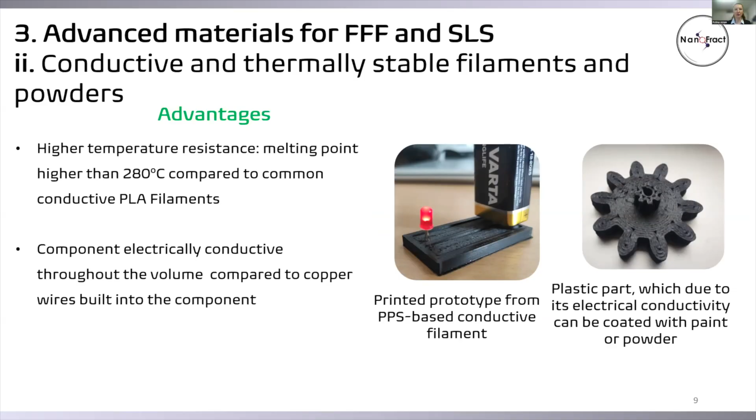The main advantages here are high temperature resistance - the melting point is higher than 280 degrees, compared for example to common conductive PLA filaments. And the main advantage is that the component is electrically conductive throughout the whole volume, compared for example to copper wires, which are usually elaborately produced or built into the component.

Now I turn to the third example of advanced materials, which was obtained with both of our technologies: graphite magnetite powder for energy storage applications. We have already developed the first electrodes from it. Initially, we tested its electrical capacitance.

But due to nanocarbons inserted in it, it also has high electrical conductivity, and combined with magnetite, it's also thermally stable. It is also comparable with elaborately produced nanostructures that are only available at lab scale, and we can ensure mass production in scalable quantities.

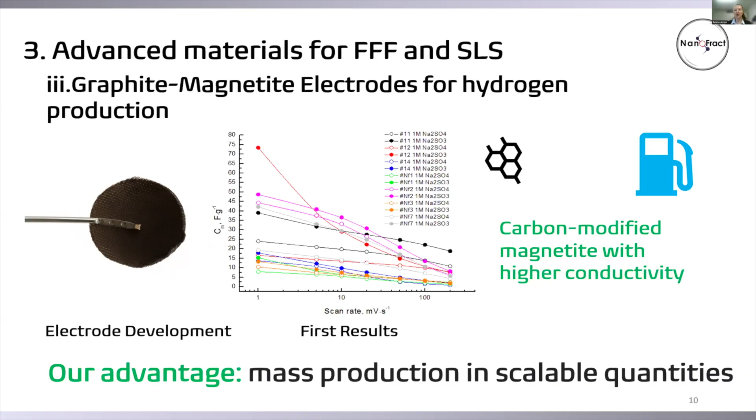The last example of our advanced materials for additive manufacturing are metamaterials for electromagnetic wave manipulation. The metamaterials are usually multi-layered powder materials with multiple layers on them.

For this topic, we are looking for cooperation partners, and the next step is the development of multi-layer structures using our technology, to be tested by partners.

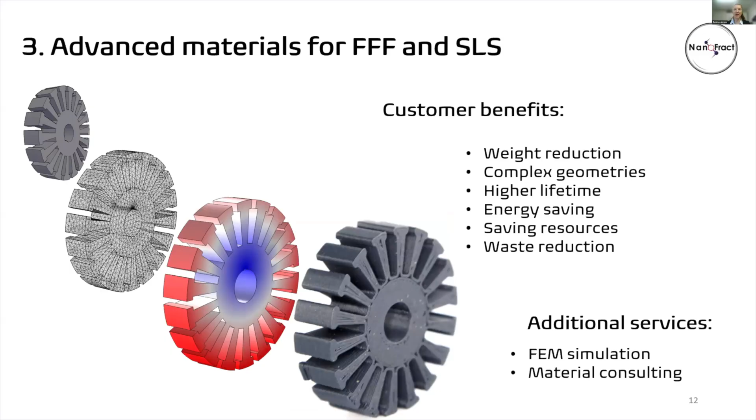Now I want to sum up the third chapter of my presentation and outline the main customer benefits using our technologies. The first main benefit is obvious weight reduction due to the plastic component in the matrix. Then, due to additive manufacturing technologies, you can obtain complex geometries. Our particles are usually made from advanced polymers, and they have a high lifetime. Our customers can save energy, resources, and reduce their waste. Additionally, we provide services like finite element simulation and also material consulting.

At the fourth part of my presentation, I want to cover the topic of biodegradable micro and nanopolymer powder for additive manufacturing. Due to our unique fine grinding technology, we can reduce the particles to nearly 100 nanometers. Here are some applications: these powders can be used as additives for 3D printing applications, for example SLS or stereolithography additives. Possible markets include biodegradable implants, tissue scaffolds, or surgical meshes which are directly printed, or drug delivery devices, which were described previously by a previous reporter.

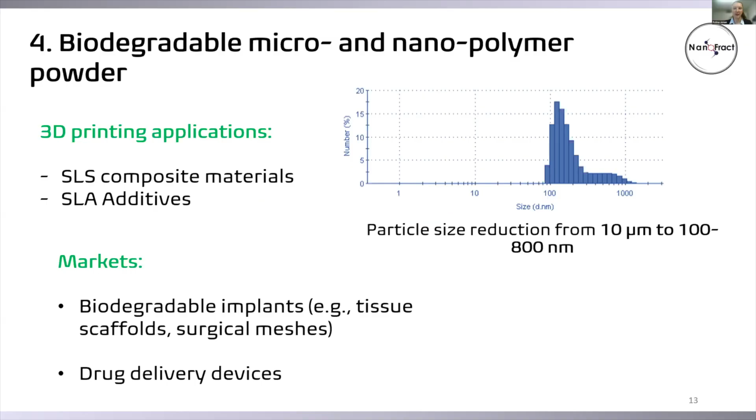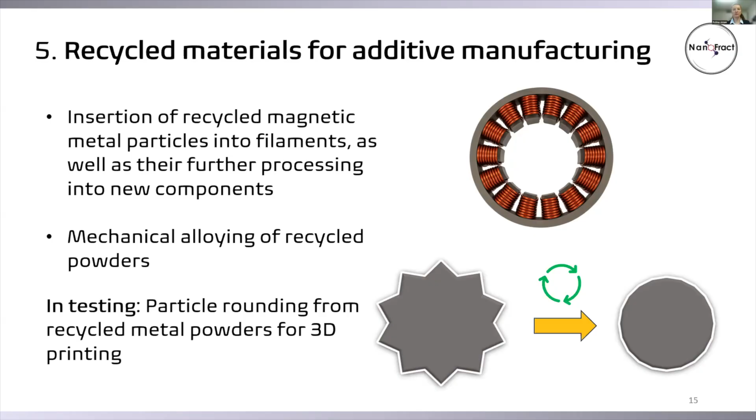Last but not least, apart from our material development techniques, we also develop processes and equipment. One of them is particle rounding equipment, and with the help of this equipment we can round mainly metal, recycled metal, or polymer particles and make them applicable for 3D printing. Another possible application is the use of recycled metal powders, which usually have no spherical form, inserting them into plastic filaments so you can cheaply produce parts using common additive manufacturing technologies.